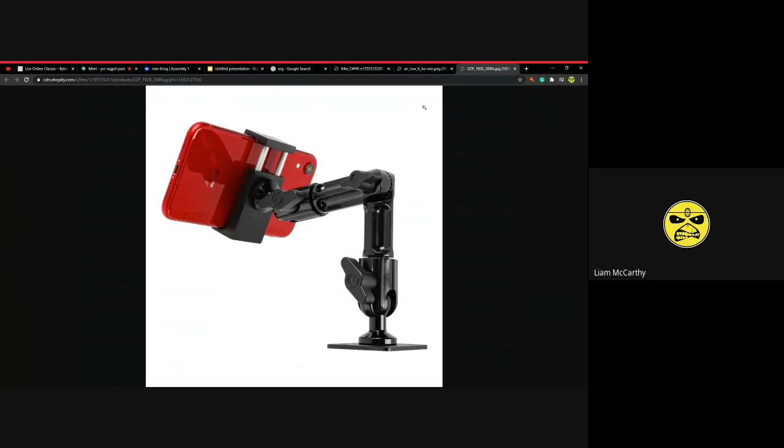But an erg, which is a rowing machine, doesn't have that. It just has this tiny little monitor that's smaller than your phone, only in black and white, and it only shows a few statistics. It's useful, but not as useful as having a big screen like this you can use to practice. So my idea is to create a phone mount kind of like this one, and design it so it can specially fit on the screen of an erg.

Okay, got it. Aravind, do you have any questions? Hello guys, hello, can you hear me?

I can hear you, okay. I am Harindan, one of the members of Bytes and Bots India. So this is your project, right? You are going to do it. What's the innovation you are going to do? You already have the model, right? So is there basically any... Yes, and I have an erg at my house that I can use to take measurements too. Okay.

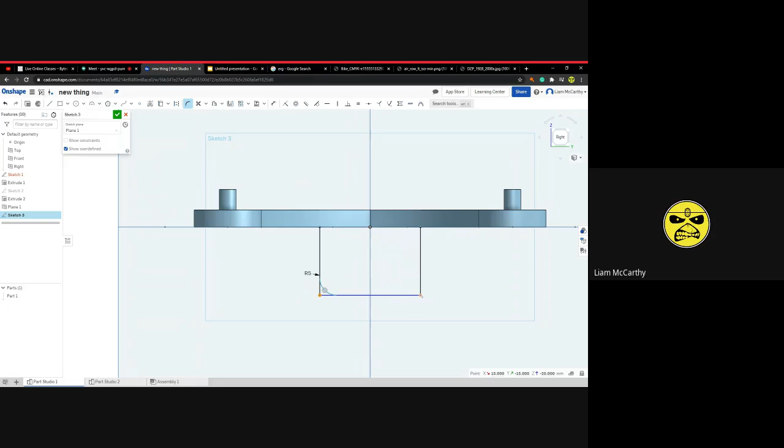Okay, share your screen. Oh wait, no, I forgot to do something. All right, let's see.

Let's go back to sweep. No, no, I don't want to. No.

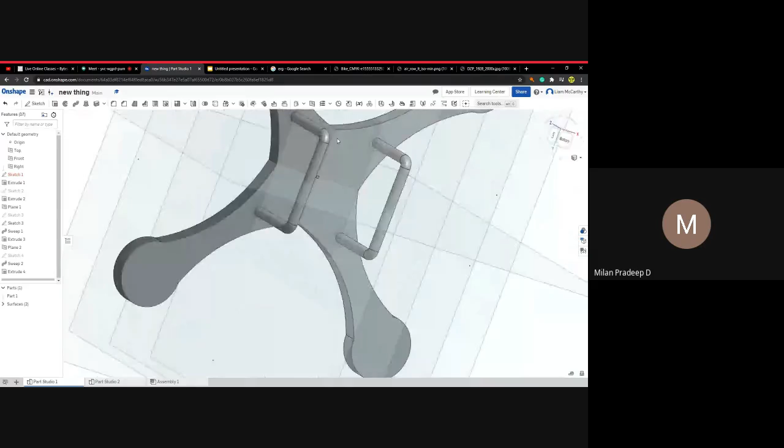Instead of lines, try to use splines, use spline curves. Let me show you here. This is how I've got the landing gear done.

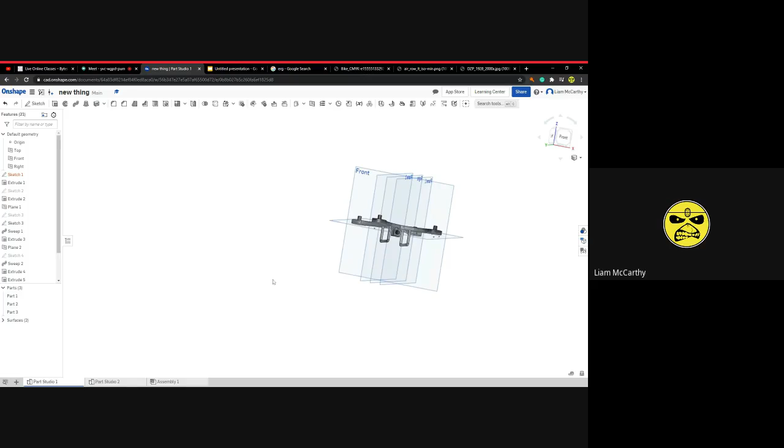Hey, where did my bottom things go? What happened to those? My stands just disappeared, they're on here, so why aren't they on here? What the heck? What's going on?

Can I have some help here? Hello? Yes, yes, can I have some help? I don't know why. Okay, so if you look on Part Studio 1.

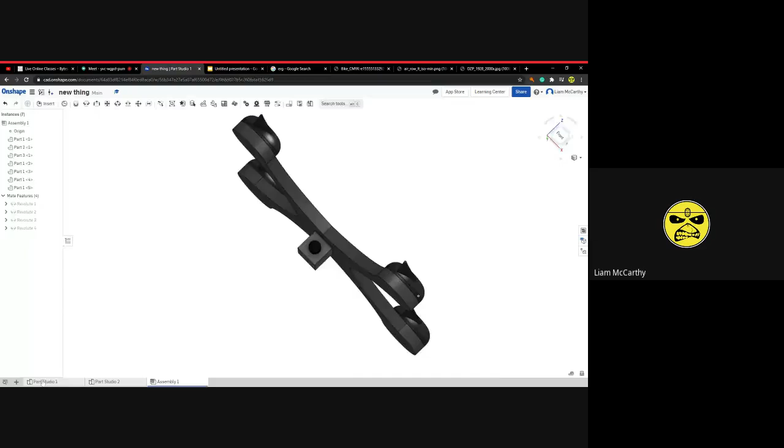I have now my camera and my landing gear, right? But when I go here, there's no landing gear, just the camera. I know it's not that I imported an earlier model, because I actually made the landing gear before I made the camera. When I imported it over, the landing gear just disappeared, and I don't know why.

Create a new assembly and try with that. Alright. Yeah, you see, it's not there. Part Studio doesn't work with the new assembly either.

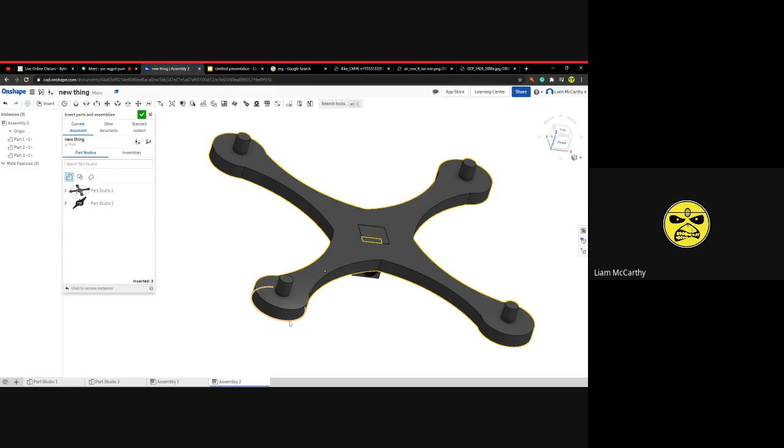Go back to Part Studio. Okay. What is going on with Sketch 1? Jeez.

Use Boolean to make it into a single part. This and this. No, right, Boolean. Oh, use Boolean to make the entire thing into a single part? Alright.

Which is next to the, where is it? Oh, there it is, I found it. Like part 2 and part 3. Okay, click enter.

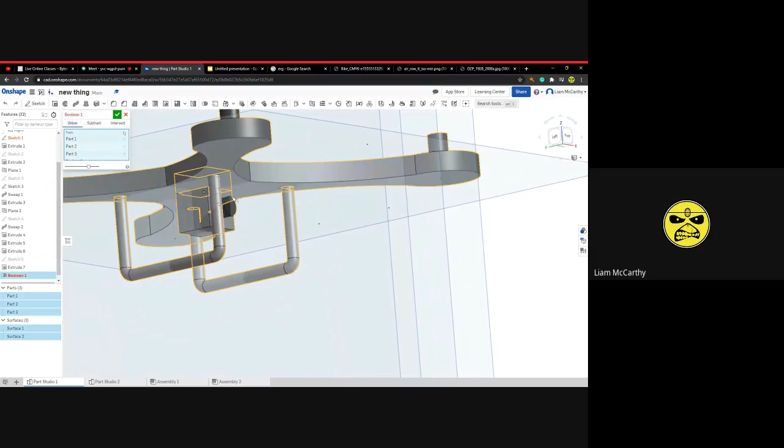Alright, these are surfaces, oh I need to add these. And add. What's going on with Boolean 1?

I think you cannot select the surfaces. Well, then how are we supposed to get them to show up? Delete the surface underneath, okay, now click enter. Yeah, now it works, now move to the assembly.

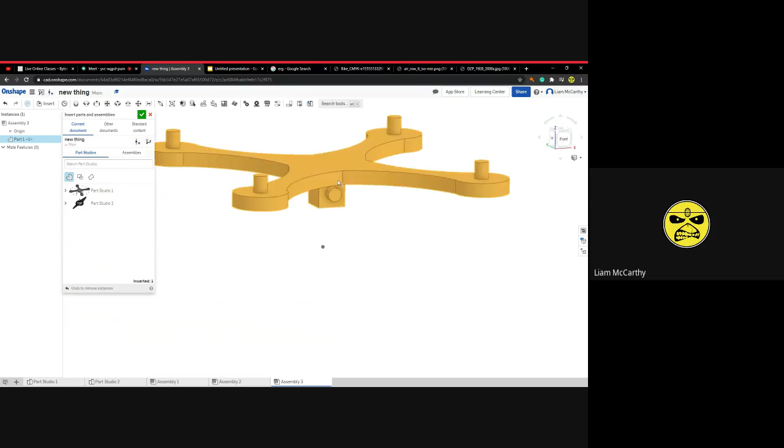Okay, now move to the new assembly. Delete that one. Yeah, it still doesn't work.

I think it has maybe something to do with Sketch 1. See what's that? Yeah, I think you have drawn a line. Delete that line. Delete that straight line. So which one? Yeah, that one. The line which you drawn for the stand. This one? Yeah, this one, that one, delete. But it still doesn't work though.

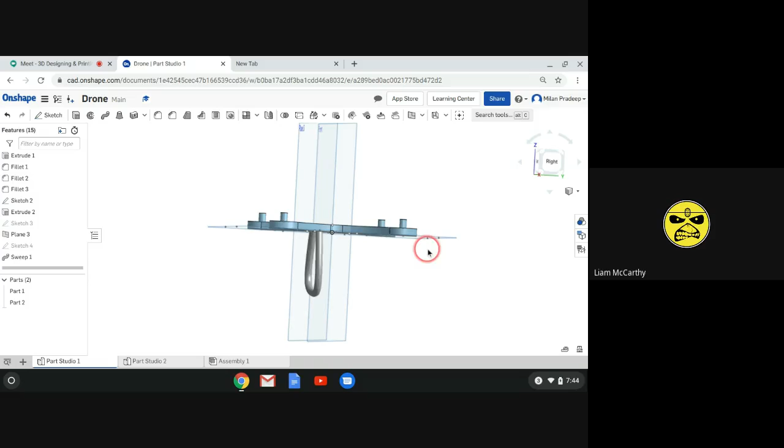Okay, now you can see my screen. Yes, okay. I just used the spline tool to draw the stand. Okay, spline and loft. But why can't I just use sweep though? I make a few straight lines, and then I put a curve on each of them, and then I use sweep. Why doesn't that work compared to spline?

It works. Actually, what's your question? Why doesn't it work when you use a spline in a loft compared to when you use straight lines with curves at the ends, what do you call it again? Straight lines with fillets and a sweep. Why doesn't that work? But you cannot design like this when you use lines and curves.

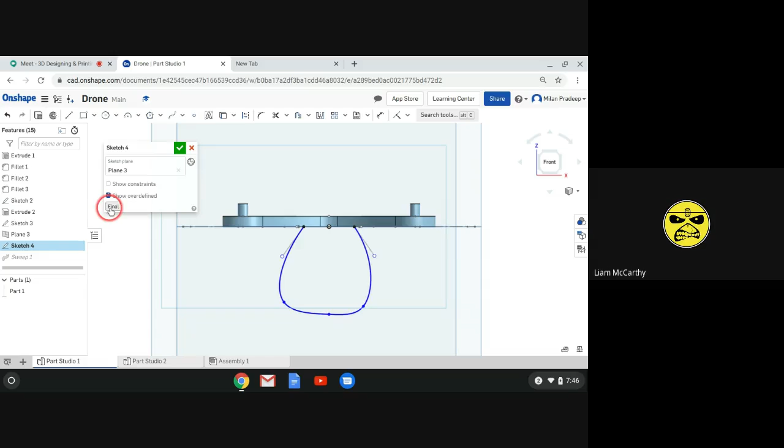Wait a minute. Okay, when using spline, you can also edit and reshape it using these three points. You cannot use it in the lines or curves. I know you can use that tool, but that's not exactly what I'm trying to do. I want a perfectly straight line down with a curve at the end that leads to a perfectly straight horizontal line with another curve that leads to a perfectly vertical line again.

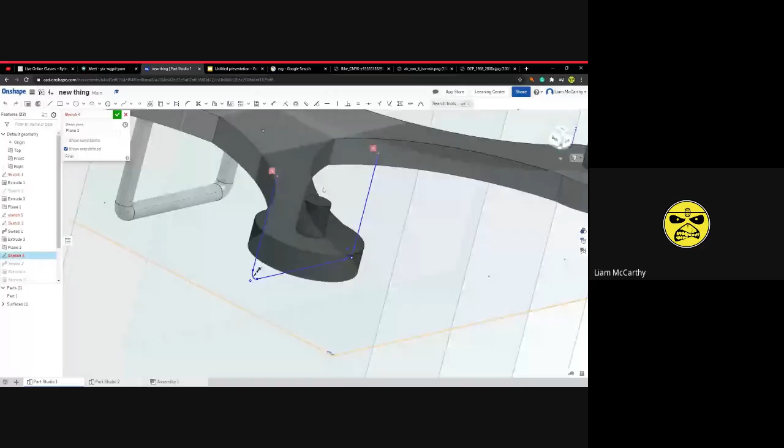I still can't get this thing to work. Like it shows it here, but it doesn't show it here. And now I just have more errors. Got an error here, error error here, and an error here. Assuming it's because I have a boolean here. I should just delete the boolean. I think that'll make the errors go away.

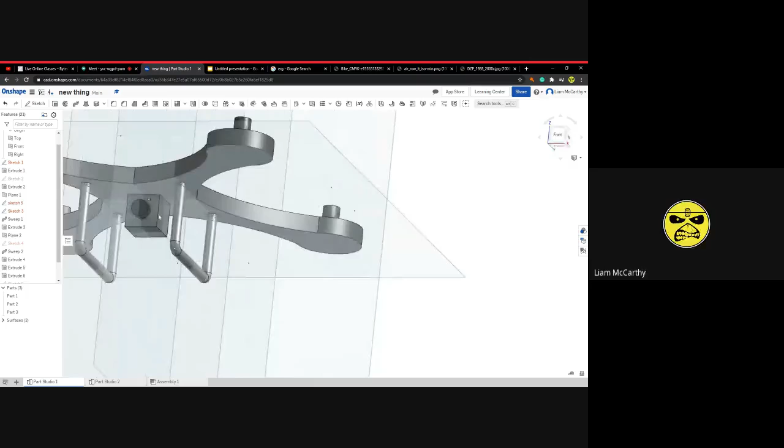No, what is going on? I don't get it. Should I make a construction line between those two points? Edit sketch one, okay. But it still shows sketch 1, sketch 5, sketch 3 as red color. Yeah, I don't know what's going on. Tried it with sketch 5.

Okay, click and delete that constraint. That red color, click on it. Delete that. Click and click OK. Okay, go to sketch 1, so that's sketch 3. That's what I need to do. Yeah. Go to sketch 1, sketch 4, delete that one. Deleting constraints, I don't even know how those constraints got there in the first place, honestly. Okay, and here there's something I have to delete, except I don't know what it is.

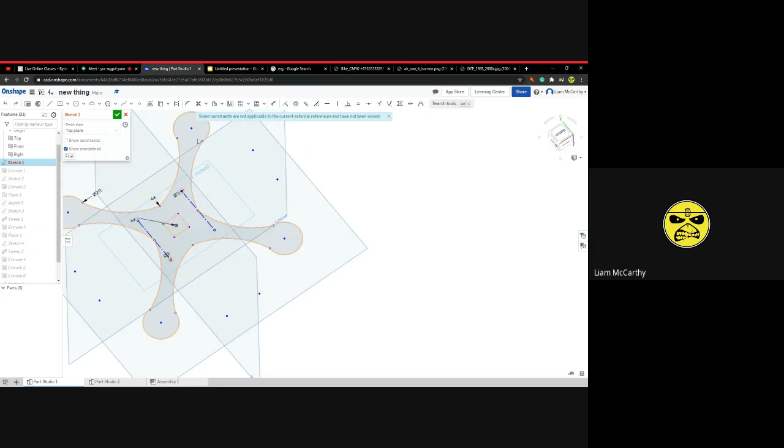Some constraints are not applicable. So I'm assuming that's the same error as the last one, but I don't see any glowing red constraint error lines, so I don't really know what's going on. Click OK. Click the green check mark. Okay, still it shows sketch 1 as red color. Okay.

Now go to the assembly. Okay, go to the part studio.

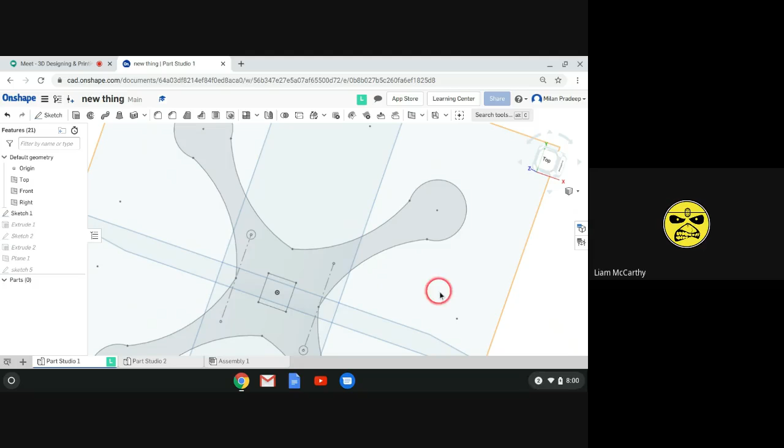Or you just delete all of it and retry. Maybe you'll just make a new assembly and try again here. Okay, so insert. No, it still doesn't work. So something else is going on here.

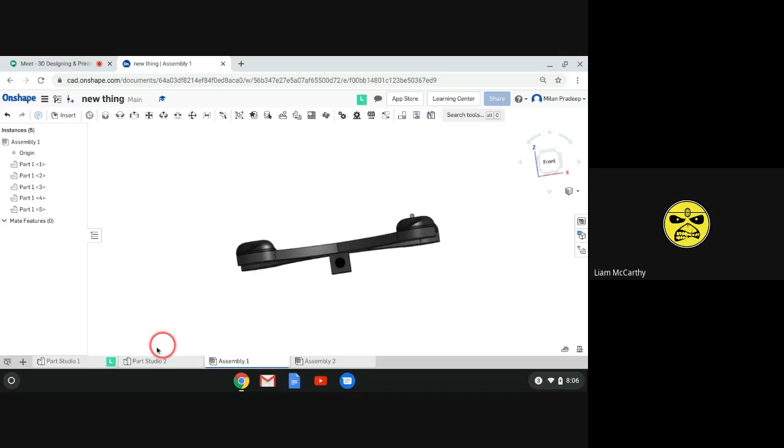I think you used the sweep as surface sweep. You have to use the solid sweep. Sorry, solid sweep. So I used surface sweep, but I have to use solid sweep. It shows as surface.

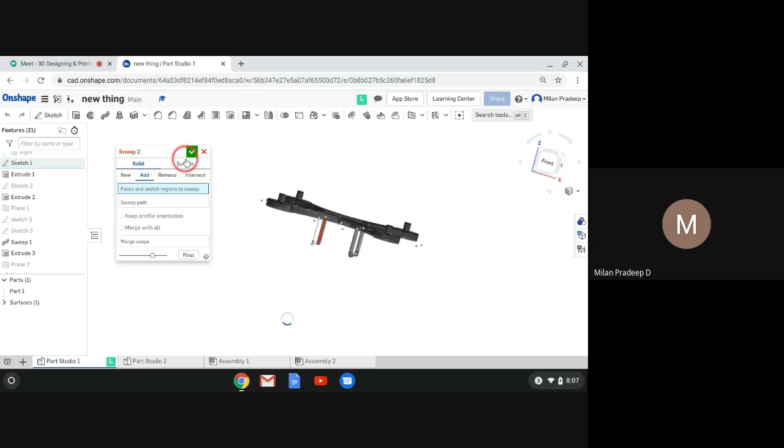See, you selected a surface. So now I have solid.

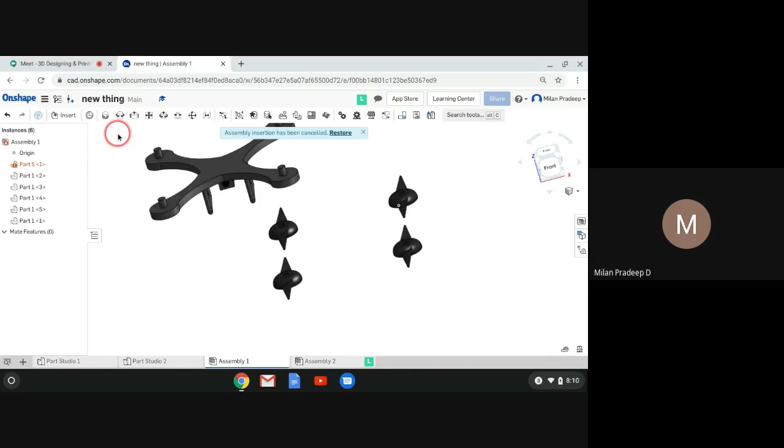All right, it works. Yeah, because you selected the surface, that's why the big problem. It needed to be a solid. Yes, so I didn't see that.

The stand should be in solid. Okay, that's all. At home, try to use splines instead of these lines. Make it bigger because it's a small stand. Try to use with spline.

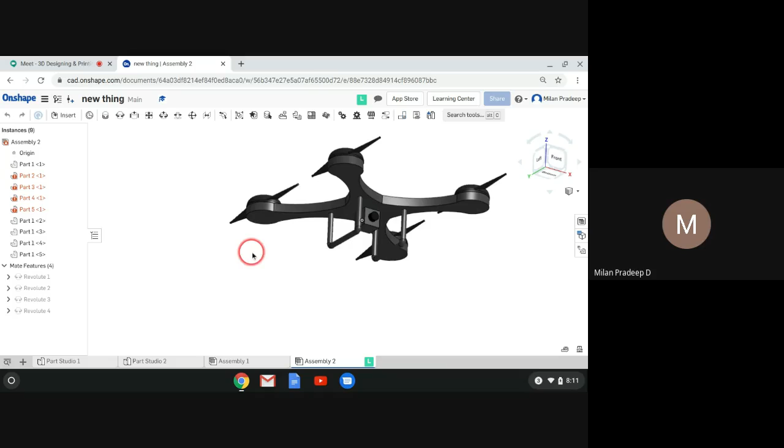While sketching the spline in that plane, use point normal plane or offset plane. Anything you can do. Wait a minute, let me show you. See my screen. All right, I can see your screen.

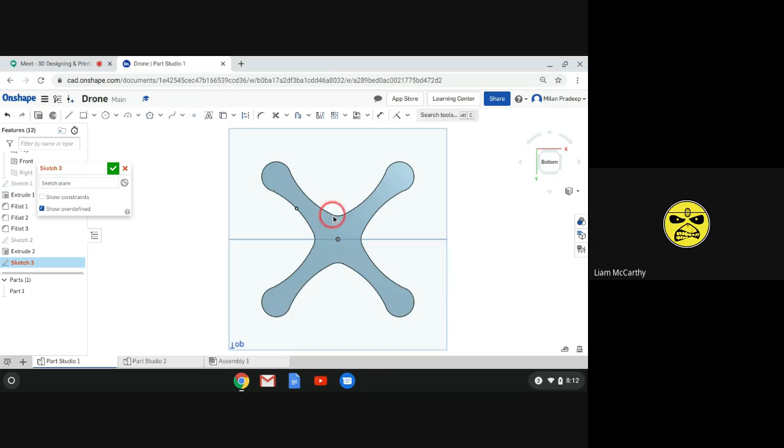On this surface, I draw a construction line. Okay, construction line.

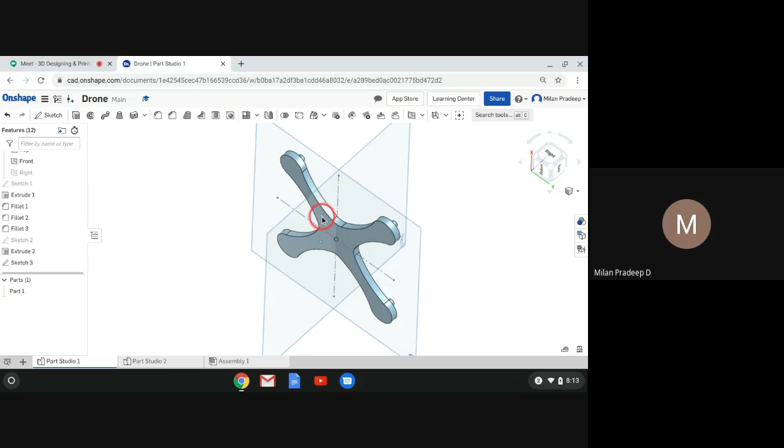So let me give it a second. Now I'm going to sketch a curve on this point. Let me show how to do that. Go to plane, select plane.

Instead of offset, wait. Are your lines a specific distance? Which line, your construction lines - are they each a specific distance, or just construction lines? It's a construction line. All right.

In the plane, instead of offset, go to plane point. Select plane point and select the point. New plane, select plane point - wait, not point normal. Plane then point, and then, parallel, what do I select? What's the question? What do I select then?

Oh okay, wait a minute, let me tell you again. Go to the plane. Plane then point, and then select - what do I select? Okay, select the plane. I mean, select the point first, this point. Okay, this point, and then the parallel plane - the front plane is parallel to this point, so select the front plane.

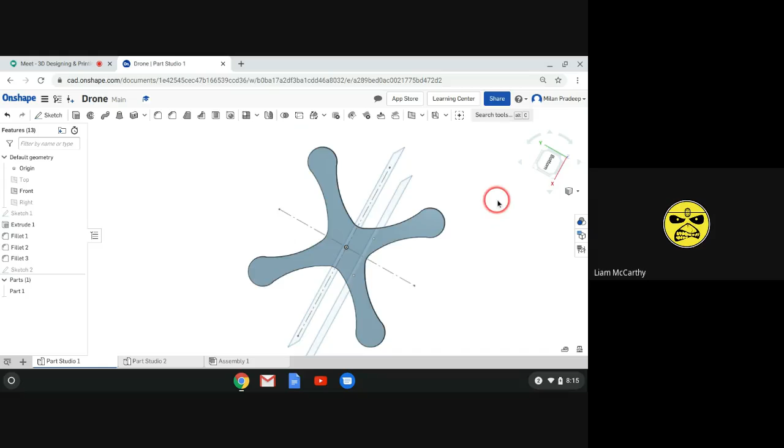Now see, yep, the plane is created on that point. I'll hide the top, then you can see it. So wait, I make a vertical plane on which point? On this point that I created, this point.

That one, yeah. Okay, I already have that point there, so I put it in the sketch, you can see. Wait a minute, what the heck? Why isn't my plane loading?

Is it like - see here, next to the spline, the tool called point. You can add a point on any of the surfaces using this. Okay, right? But I basically already have a point on those places. Is it like between 2 points?

You can add any. Sorry, I didn't understand your question.

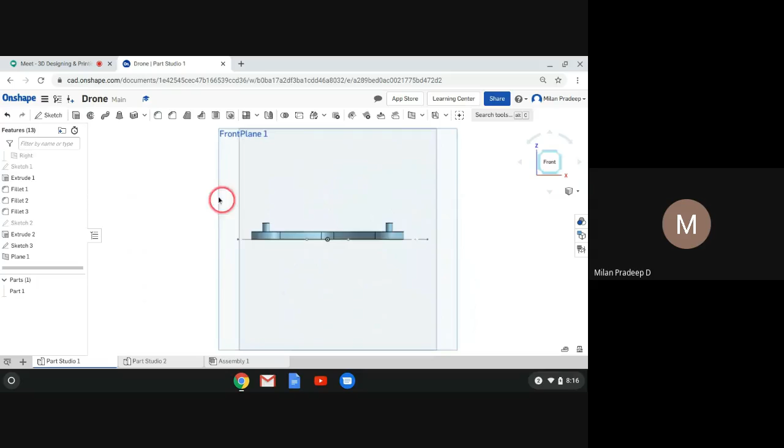Okay, when I click sketch and sketch on the new plane called plane one - wait, how do I? No, I don't have the new plane though. Wait, how do I get that? Because it's not doing it when I put it on those points I have. It doesn't work.

The shadow screen. So here we go, I have my 2 points selected, but it still doesn't work. Because you already have a stand, just start with a new one, or delete that stand and start from the first.

I'm teaching you the alternative way of designing the stand using spline. Just listen and do it at home. Okay, okay.

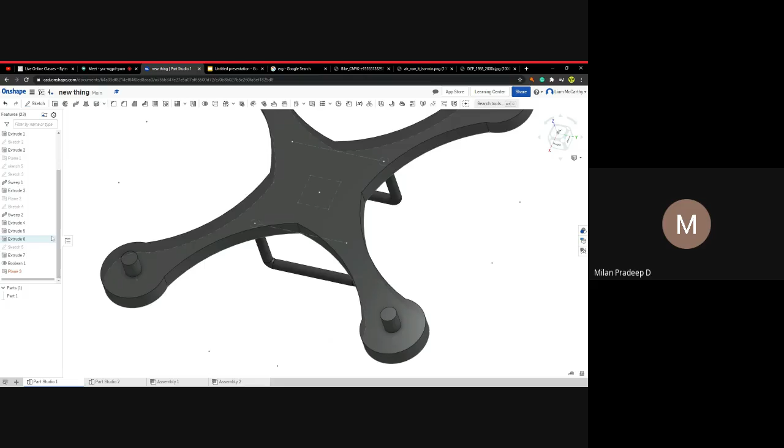Now create a new sketch and sketch on the new plane. I don't have the new plane, that's why I'm teaching just now. I'll teach you how to create the new plane. But my plane doesn't - I put it on the point like you said, and it doesn't work.

Wait a minute, let me show you again. So yeah, you have your 2 points. Okay, now I don't have any points. I'm going to sketch a stand which is parallel to the front plane.

So I'm going to sketch points on this surface. Create sketch and select right, select, and make points. I already have points selected there, so I don't need to make new ones. Okay, so I can just make.

Sketch on the surface, sketch on the face of extrude one, and then yep, click point - here is the point. Click point and add the point anywhere you can, just click on it like this. See, the point is created.

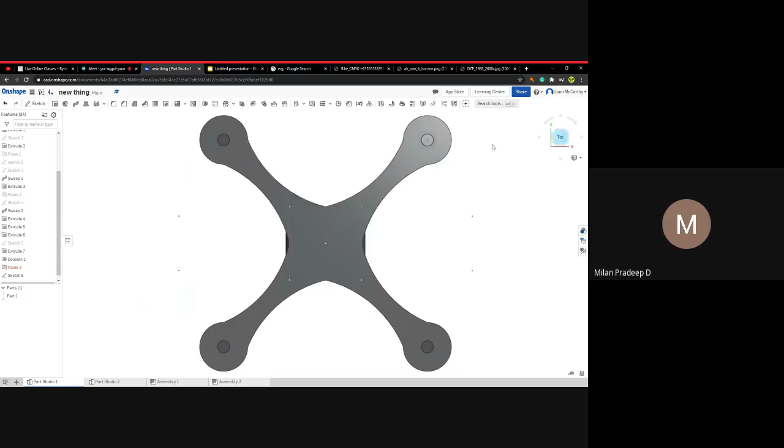Oh, you make a sketch on the face of extrude one, face of extrude one, and then using the help of the mirror construction line, you can get the output. All right, wait, let me add the point at this point. Okay, give me a second to add the point.

All right, one point, two point. What? Why? Is there a way to get them exactly on the little space right there?

Do one thing - create a new part studio and just try how to add points on a surface. Just draw a square and extrude it, and add points on that. Okay, new part studio.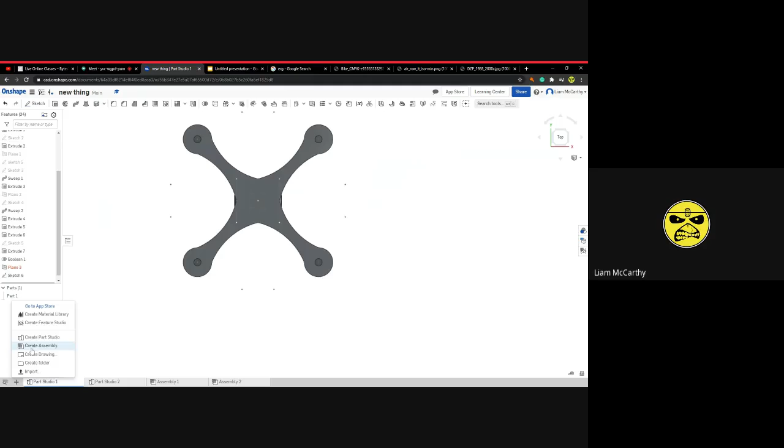Okay, I make the points. Now what do I do? Extrude the square and then add points on the extrude. Okay, so sketch a small square.

Make a square and extrude the square. Make a new face on the face of the extrude. I make the points.

All right, now what? Now complete the sketch - click the green check mark. All right, green check mark, and now what? Make the... go to plane. Create plane.

Plane point - just select the point and the front plane, and then select the front plane. Sorry, then I'm not selecting that - select the top plane. Sorry, oh, top plane, okay, not the front plane.

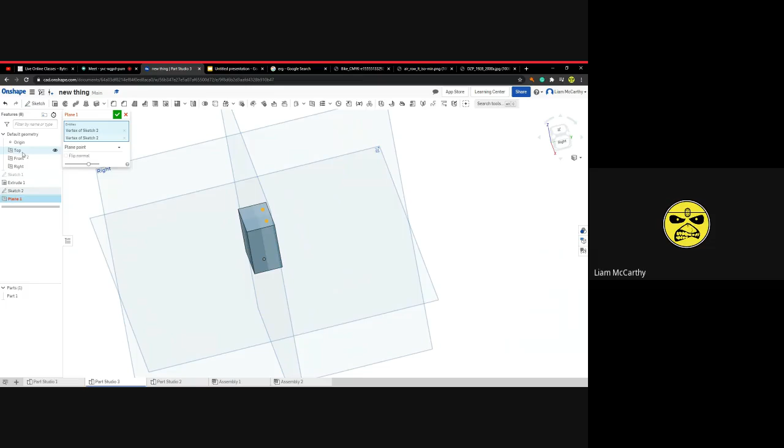You want the plane that is parallel to that point. Okay, top plane - top plane is parallel. I think you have it selected. There's also some error - just click on plane one.

Delete the vertex of sketch 2 and sketch 3. What? You have selected vertex of sketch 2 - just delete that.

I thought I made the points. These are the points, okay. Now click the point, and then click the top plane. Now click OK - all right, now I have a plane there.

Okay, let's try it over here. Okay, like that you can sketch in that point - draw a spline on the plane.

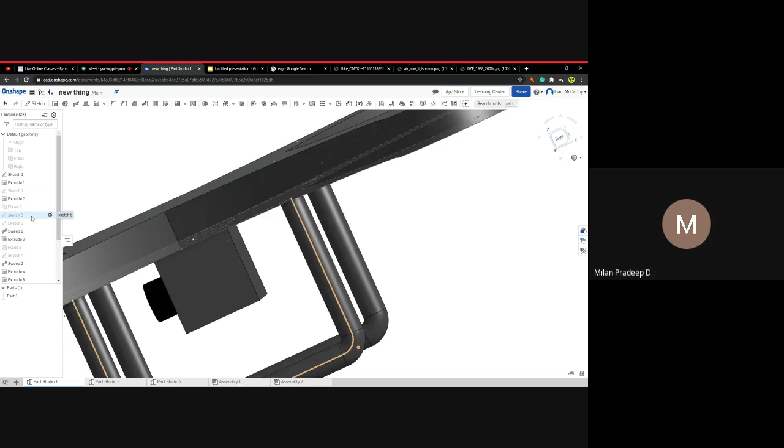I need to do something here - I need to make a construction line upwards. All right, five.

What the heck, why can't I still use it? Why can't I put it on the point?

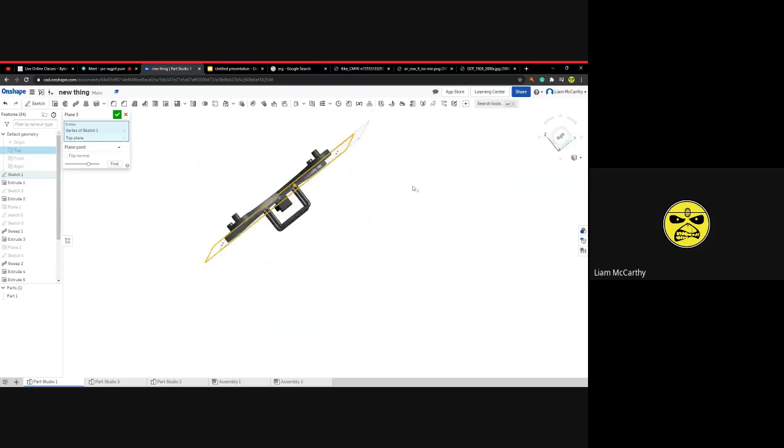Make sure you have selected the face of that. Okay, so I have the point. Now let's get the plane here, and then select the top plane, and I have it.

Or maybe I need to select the front plane. Wait, front plane... no, just top plane. But then why doesn't it move anywhere if I select the top plane? It just moves to the side.

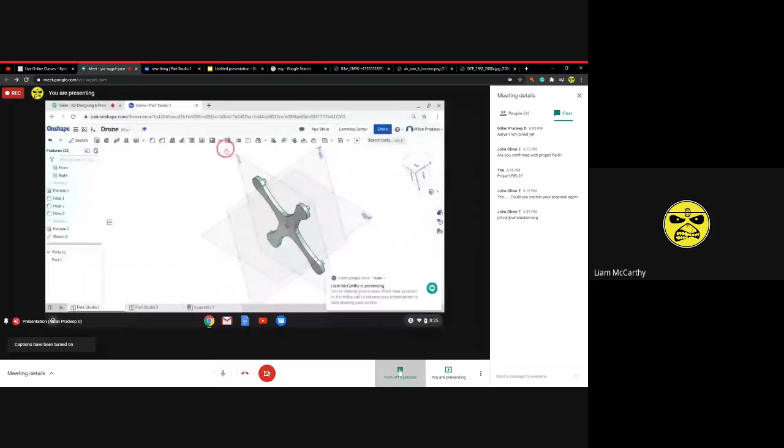Can you see my screen? I can see your screen, yes. I can see your screen. Now, okay, so now I have the point.

The next step is just go to the plane and select plane point - point, right? Select point, then I select my point. Now...

And then I need to select the plane - not the front plane, that is the right plane. Right plane, okay, so then I select the right plane, and then I get my new plane.

The plane which is parallel to this plane is created. So according to your sketch, you can select the plane, because I'm going to sketch here.

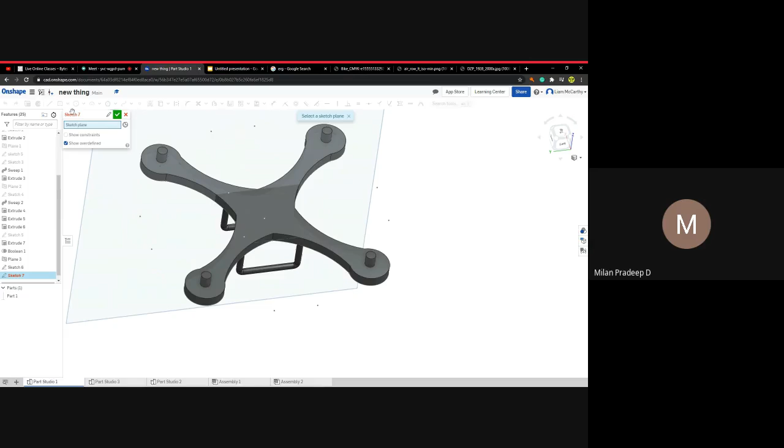Let's see my cursor - I'm going to sketch here, so I selected the right plane. So if you want to sketch somewhere else, you have to create the correct plane.

Just to show you an example - so now I have the point and the plane, the face, and click the new plane. Then I use the spline from the point, connecting the spline like this. Just draw a small curve as an example.

Now see the curve - is it on this plane? Yes. So draw a circle and then loft it. That's all.

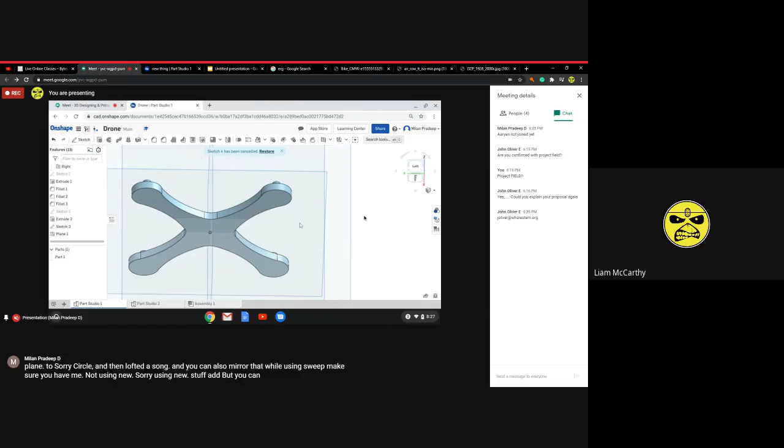And you can also mirror that while using sweep - make sure you're not using 'new', use 'add' instead, so that you can mirror that. If you add that, it makes it into a single part so you can mirror this. Okay.

All right, okay, that's all. If you have any questions, you can ask. Also, try it at home. Don't add more constraints in the sketch stage, that will often show some error.